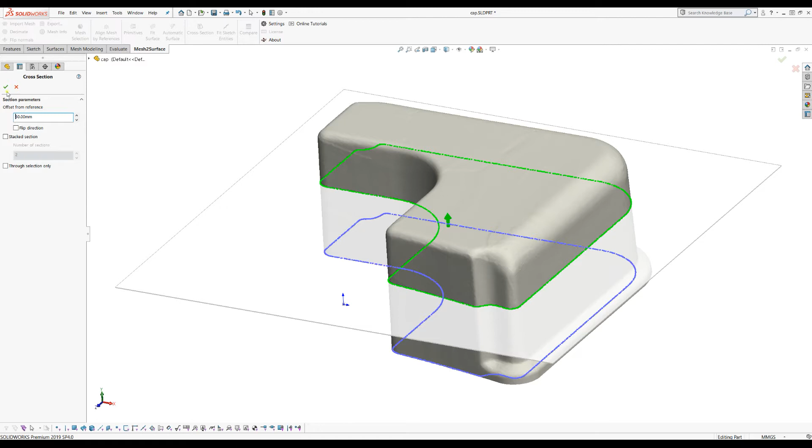I'm using the same part, and again on the top plane I will create my sketch, but before that I will create a cross section. I will just slide the section plane a little bit higher. We'll make it a 30 millimeters offset, and I will press OK. The reason for this is that I just want to show you a bit different shape. I will hide the mesh as I don't need it.

We'll take my top plane and we'll start creating my sketch. Again, we're going to use the fit sketch entities. And now what you see is that we introduced color indication of what we are going to do. As you see, the color is green, which means if you brush, it will fit a line. If you switch to arc, then it will be red. This is at least something when you start using it, just to show you what is going to happen when

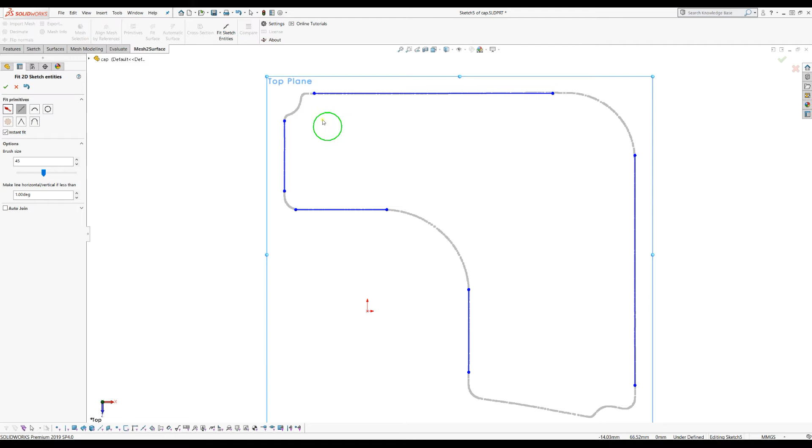you finish your brushing. I will start, of course, with a line here, and we'll just brush my points, and you see that I got my lines here, and we'll create them here. Normally you should have a strategy to have fillets: leave them, don't create them now, but leave the software to actually interpolate and create them the way you want. For example, here I have an arc that I will need to fill later, so I'll just take and mark this to be my arc.

Now you know that you can use these modes, and you can always right click and switch from the context menu, but in this case I will not do this. But we introduce a shortcut, which is if you hold the control key and if you move the mouse, you see it becomes blue. The reason for this is so you can just paint, and when you leave, it will actually intersect this. As you can see, this is the way I do this, and I intersect my primitives.

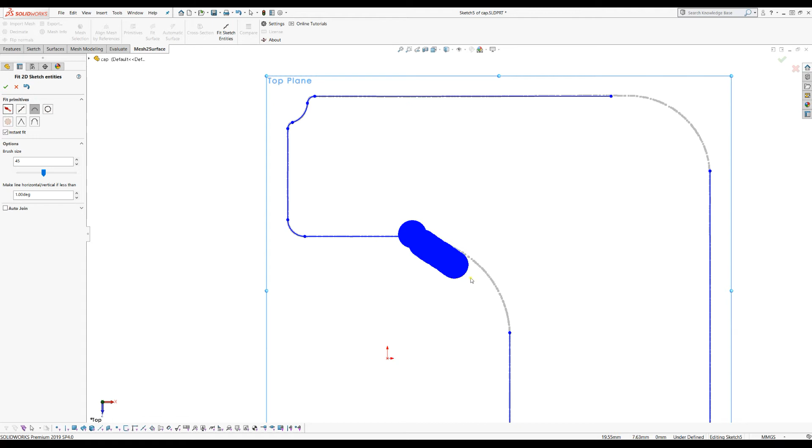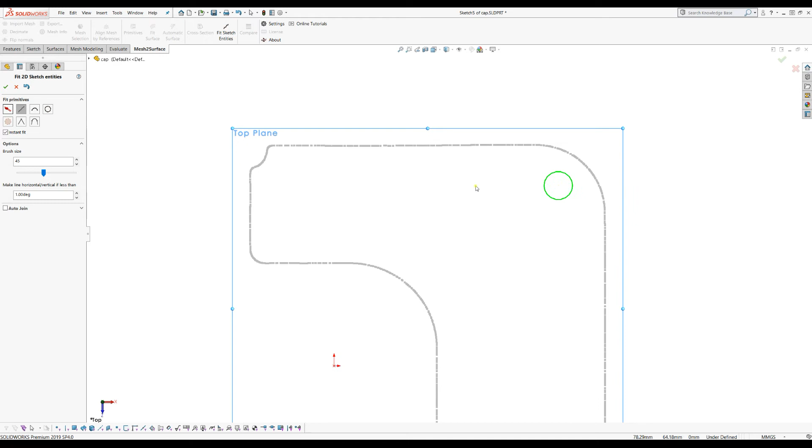Again, if I repeat the same thing over this, it will make it a tangent arc here, and this is the quick way for you to actually create your intersections and create your sketch in a more effective way. This is quite a time saver, and this is how quickly you can reconstruct your sketch. I will just cancel this now, and restart my mode again, because I want to show something that's a bit more intelligent and easier to use.

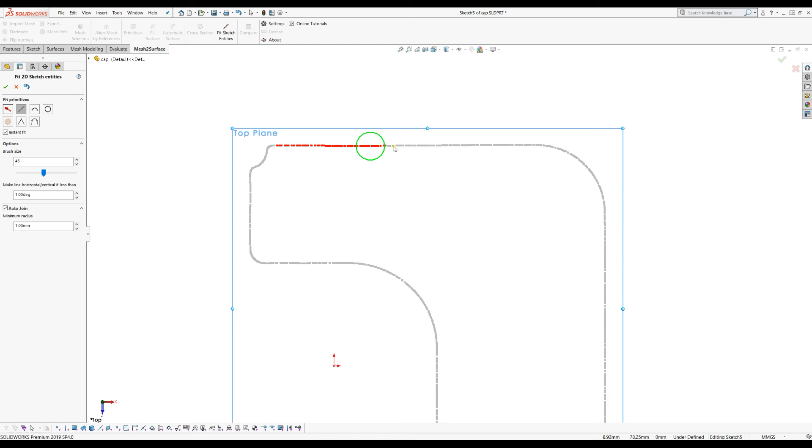We introduce an option which is called auto join, and this option, when it's enabled, when you create your primitives, will automatically intersect and create a fillet between them. So let's start building our model here. I just paint and extract my line. I will just paint and extract my line, and as you can see, it automatically fits this. At any point you can switch off this automatic join, so you can see your original extracted primitives.

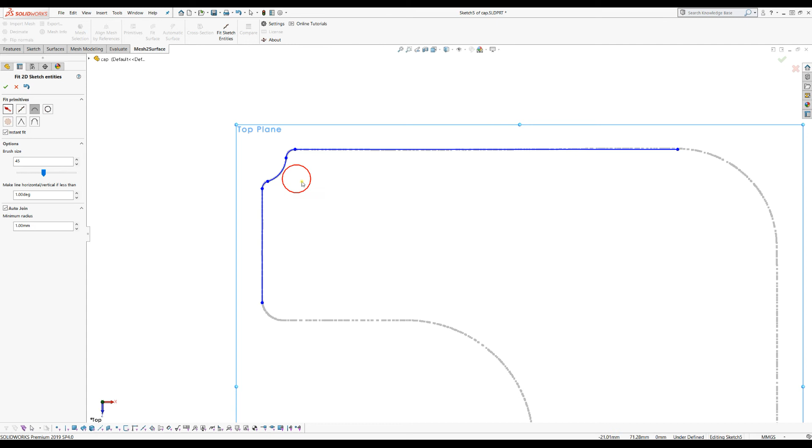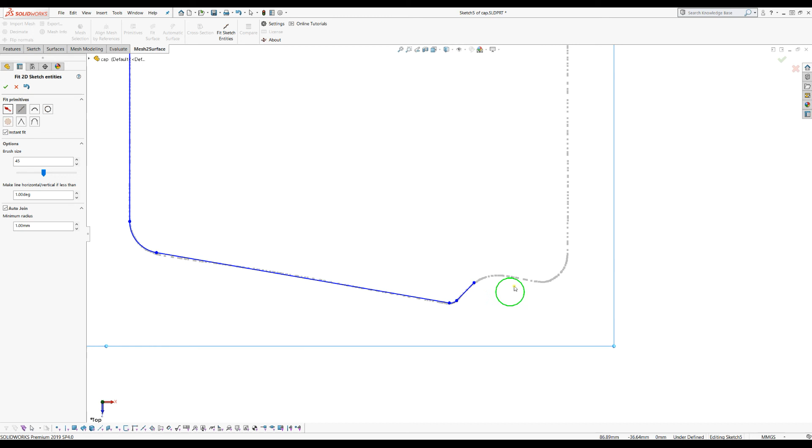But in this case I will continue, and I will just create my arc here. I just painted. As you see, the software automatically connected them. So let's finish our project now. I will just brush here and create my line. We'll just move and interpolate a line here. And as you can see, the software, step by step, just does the job for you, and you can easily create your sketch in no time. Here I will just brush this, it will create a line, and my sketch is technically ready.

Before I finish, I just want to explain a little bit about this radius control. The main idea is that sometimes, because of the scanning, you may get noise, and the software automatically will want to create a fillet. So you can control this. For example, if I say that I want my fillet to be a minimum of 3 millimeters, you see that it creates the fillet only in the areas where the resulting radius will be bigger than the given radius. So if the radius which the software determines is less than this given radius,

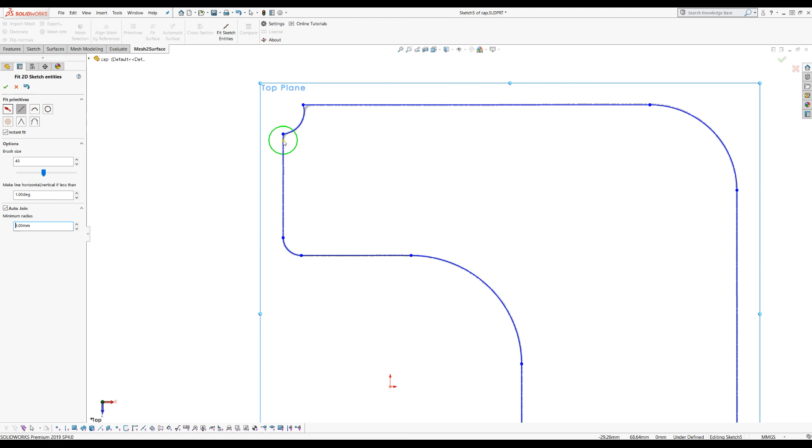it will assume that this is a sharp feature, a sharp corner, and will leave them intersected. So if you want to create everything with sharp corners, we can just put a huge value here, and you see that everything becomes intersected only. Of course, in this case, this is what I need. As you can see, I'm happy now. I just press OK. Everything is created in Solidworks, and you can continue your modifications here.